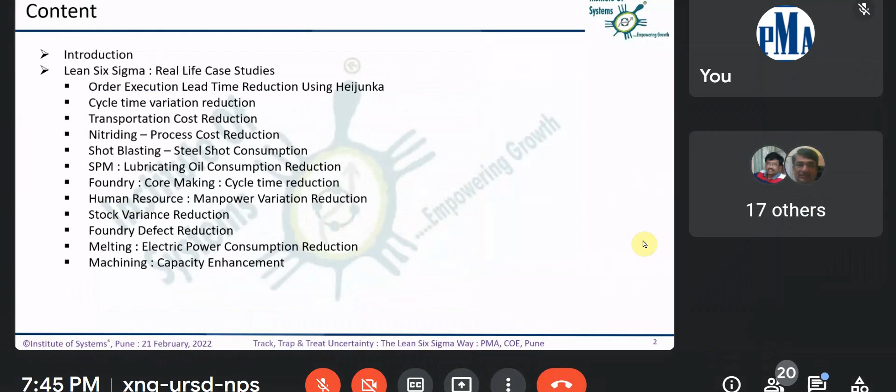So, trap and treat uncertainty. Uncertainty is something that we were never talking about, but then suddenly we started talking about. But there is a way you can deal with this, and this session will take you through how to deal with that. With all disclaimers, I'm saying this.

We are going to cover introduction to the topic basically, and then I'm straightaway going to go to the real life case studies, which are coming from 12 different case studies that I wish to speak upon, but time is a constraint. So let us see to what extent we can cover this, and there is a rider to that - I should be making it interesting and appealing to you. Hopefully I may be able to do that.

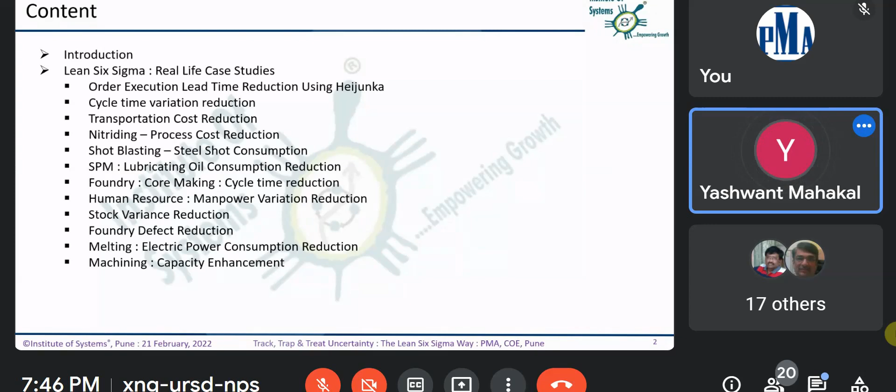So friends, let's go with the introduction. You must be aware of these graphs by now. You must be scared of looking at these graphs, and this is nothing but the COVID graphs that you would mostly not wish to look at - daily deaths and daily new cases. And this is the thing because of which this word became

unfortunately popular: uncertainty. Otherwise, this uncertainty word for manufacturing people was only limited to a guy who is doing calibration in the lab, looking at the uncertainty band for an instrument. Beyond that, that word uncertainty never came out of the calibration lab as far as manufacturing professionals are concerned. But then the entire world knew about it in the last 2 years.

So what is this uncertainty? As we all experience this - the source of uncertainty is something related to, in philosophical language, unknown and unknowable. Unknown and unknowable. This is nothing but the definition of truth, and uncertainty is nothing but truth. We have to live with that. And the truth, by its characteristic, has two characteristics - unknown and unknowable. So we're experiencing this reality.

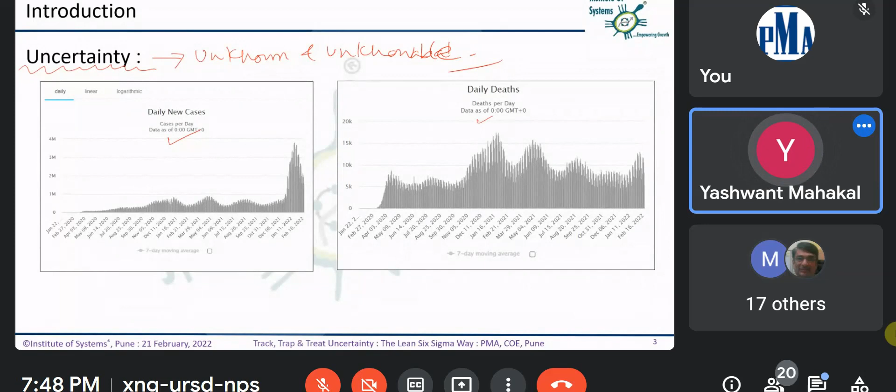Now, how do we deal with this? We need to understand the three categories of uncertainties in business. One comes from external sources, which is like nature - COVID is one of that. Government policies, society, various cultures - they all bring uncertainty with them.

Then in business, the second source of uncertainty is the customer. If you ask a production planning and control guy, PPC guy, he would always say that the demand fluctuates, schedule fluctuates, and he may get a call from a customer anytime. He is the most uncertain person. Marketing guy is the most uncertain person. So it's not that we haven't understood uncertainty ever - in fact, we experience it every day, but we never talk about it. We started talking about it globally, so loudly, with COVID, but we were living with this all along.

Then there is organization and supplier network who experiences the uncertainty in purpose, uncertainty in policy, uncertainty in procedures, processes, and the way professionals behave. So everywhere, the uncertainty is seen. And if I may start, there are gurus who have talked about this.

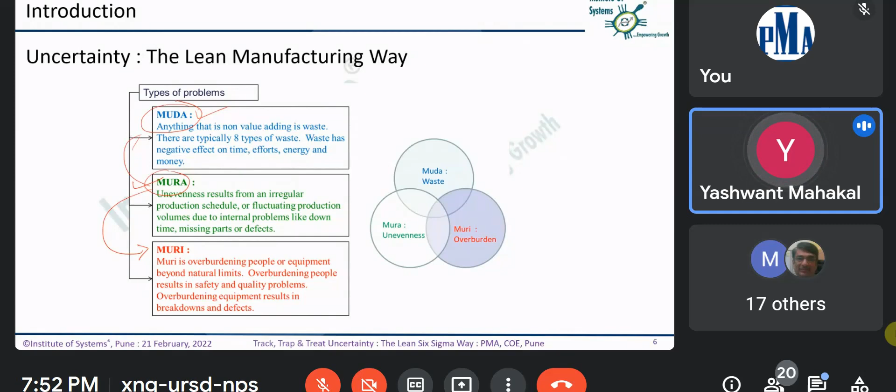But then we are so busy in eliminating wastages that we forget about the unevenness, the variation. And all of these, including 5S, TPM - you take a tool, it talks about the foundation of that happens to be reducing variation. We go further.

In Six Sigma, what are we doing? We are trying to separate total variation into inherent variation or variation due to common causes, and the variation in between the resources, which is nothing but the variation due to special causes.

Okay, so if I go back, there are ways and means to see. Actually, there is no way to treat uncertainty which comes from external things. There is absolutely no way. Partially, you can treat some of the things.

He being your business partner, your customer, you can tell him, request him. You can't request nature. Customer, you can request and work on something. And then this is in your control.

The uncertainties because of organization and the supplier network - so you have to work with your own uncertainties, plus you have to take care of the uncertainties that are coming from customer, plus you have to take care of the uncertainties that are coming from nature. So you have to be 3 times robust.

That's what the intention of these Lean Six Sigma tools is. So there is a bottom line problem of uncertainty which both these tools talk about, and there are ways to deal with this that are given. I'm not going to get into the various tools.

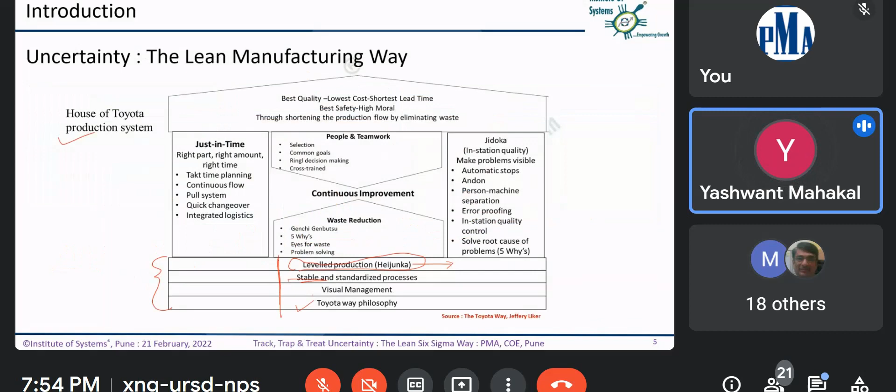I'm straightway moving towards the first case study, which is talking about one of the foundations of Toyota production system, and that is nothing but Heijunka. This case study is about order execution lead time reduction.

This is done with one of our clients. This is with our client Specialty Urethanes, who make the nylon wheels which are used for material handling trolleys.

They were victim of the large uncertainties or longer lead times for their various products, and longer lead times were of this extent - longer lead times to the extent of 44 days, average of 44 days and median of 54 days, with this uncertainty band of 58 days, which is an interquartile range.

So what we did, we applied a tool to understand this variation. We applied a tool to understand variation, which is known as the customer demand analysis, which uses a very useful indicator, that is coefficient of variation.

Now, this coefficient of variation understands the fluctuations in the demand and average demand, and it's a ratio of mean fluctuations in the demand with respect to the average demand. So what you are trying to understand from this is how each product has the average lift and what are the fluctuations there.

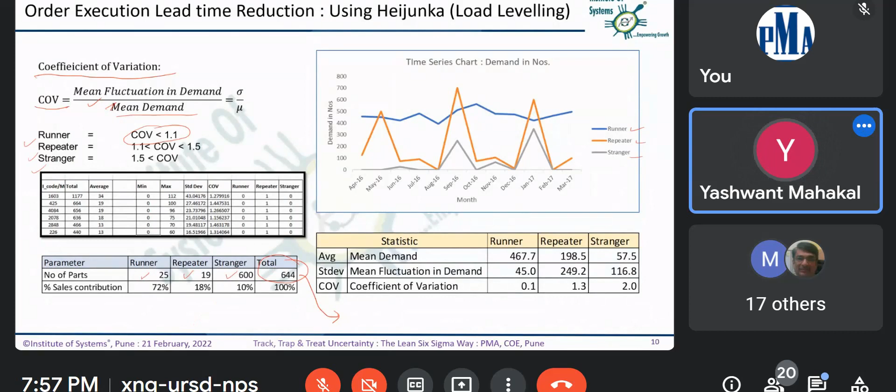There are patterns which can be seen for runners, repeaters, and strangers, and you can identify out of all your products how many are runners, how many are strangers, and how many are repeaters. There were total 644 products. This itself is variety, but this is not variation. You have to solve this. So you classify the products on the basis of coefficient of variation into 3 categories and then give your treatment. Now the problem with these higher order execution lead times was that they had a production method which was make to order.

I mean, whenever the customer demands, they would supply. Hence, since runner parts are required daily, they would always focus on doing runners, and whenever a customer demands repeaters or at times strangers, so somewhere in a week a couple of times a stranger would come, a couple of times a repeater would come, but all the time you will find runners are being done, and stranger or repeater parts are never given priority.

So what we did, we thought of changing this, and we used Heijunka, which is load leveling. Heijunka actually means every part every day - that's the philosophy Toyota teaches us. You should produce every part every day in the same amount with repeated patterns. So we thought of applying something like this.

We took advantage of the manufacturing method that they had. This manufacturing method is very interesting. What they are doing is using a metal insert. This metal insert is cast at the Belgaum factory, then machined at Satara, and then at Specialty Urethane they make these nylon wheels. And they have a set of three ovens: preheating oven, curing oven, and casting oven, wherein these molds are used.

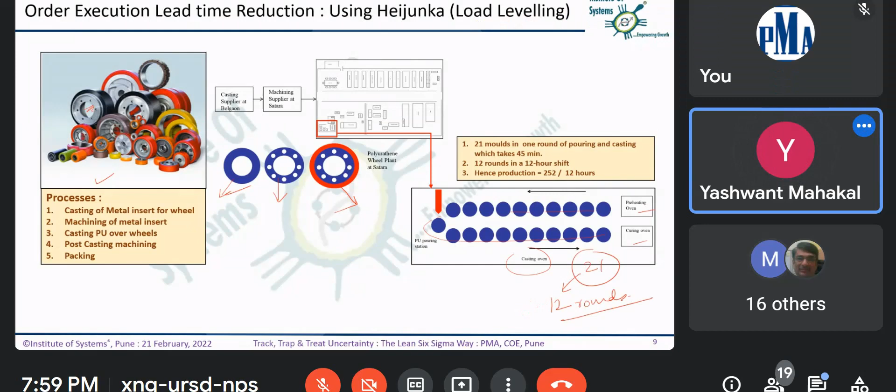To take advantage of this, instead of putting all runners on this molding line, we thought of doing something very interesting. Instead of doing all runners or all repeaters or all strangers at a time, we divided this into proportion. So out of 21 molds, every round - every 45 minutes - 2 were strangers, 6 were repeaters, and the rest were runners. So now, instead of having a stranger made once a week, you are making a stranger or repeater every round, that is every hour.

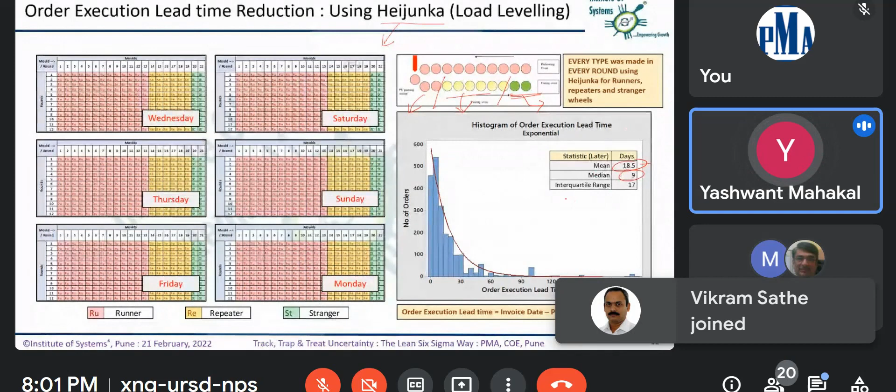As a result of this, the overall variation in the lead time was brought down by almost half - the mean dropped from 44 to 18.5. The median dropped from 25 days down to 9. The interquartile range, the variation here, was brought down from 58 to 17. So that's Heijunka for you, sir.

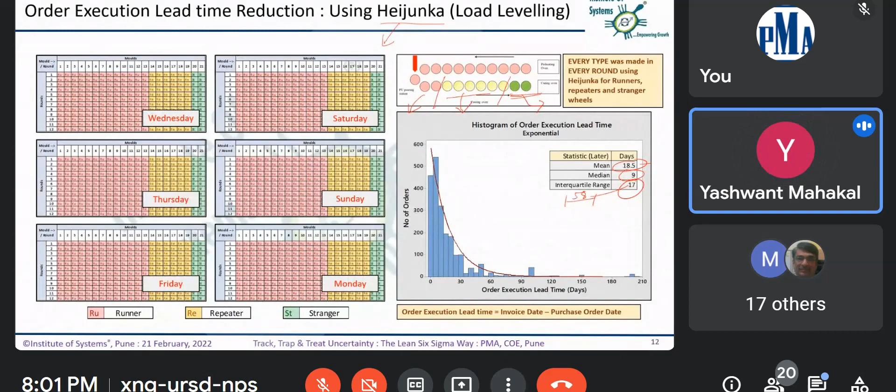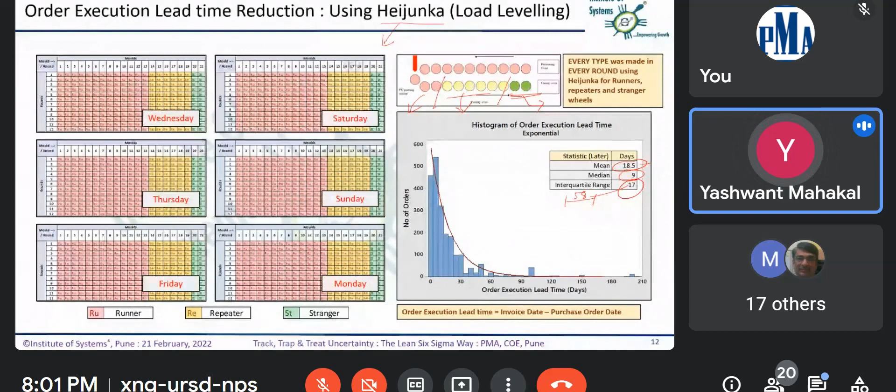This simple technique worked, and the production guys got a set pattern, and the variation in the production pattern also got reduced. Customers started getting parts early, and finally you could see a picture like this. Look at the lead times - this is the uncertainty. Because of your problems, the customer is facing uncertainty: will I get the material or not? Now that uncertainty band has dropped considerably, by almost 60%, and their lead times dropped, and their orders increased, and they are able to be treated better.

So this box plot shows you the earlier uncertainty. This is the box plot band, and this is the band they are having now. Previously the outliers were not so high, but now, because of the reduced variation, outliers would start from here - these were not treated as outliers statistically earlier. Only these were treated as outliers, more than 150 days. Now, even if it's more than 1.5 months, it's treated as an outlier.

So that's what happened because of Heijunka. Heijunka is a way to reduce variation in how production batches are taken, having a repeated pattern on the production shop floor. This is the most neglected tool - we will talk about 5S, TPM, SMED, Kanban, but we will never talk about Heijunka because it is difficult to implement. So that is the first case study, friends.

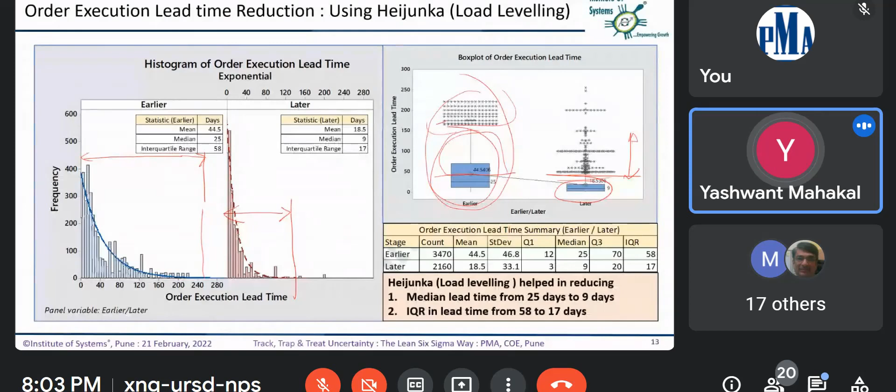Let us go to one more victim of uncertainty, that is, variation in the cycle time.

Industrial engineers by nature will always find out the averages. They will never take into account the standard deviation, though the ILO Industrial Engineering Handbook says you should find it out. But it is not practiced. It is not practiced, and they will only find out the averages.

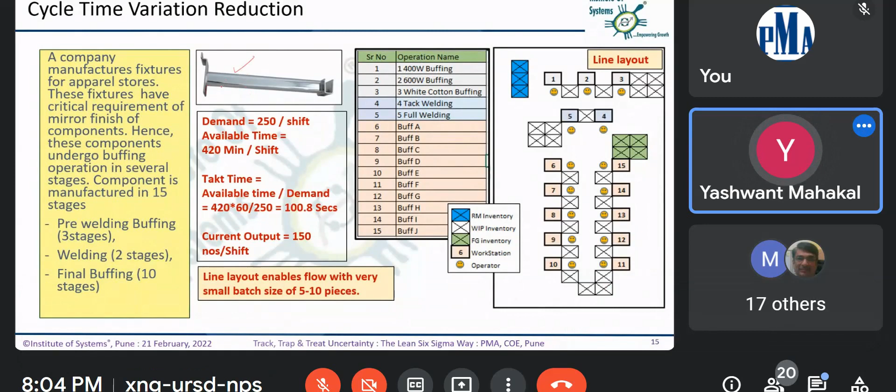So what happens here is, this is one of our clients, Pro5 Engineering from Chakan. They have a line setup wherein some assemblies for apparel store parts of Apple are made. They make these stainless steel parts and buff them to have a mirror finish. This is the process wherein buffing happens - pre-welding buffing, then welding, and then there are 10 stations where final buffing happens to make the mirror finish.

Now the problem here was that the buffing content is so high that it depends on a lot of inspections. Though there is a line, a so-called single piece flow, there are small batches, 5 to 10, still they were having problems.

Now the problem was, and we were all clueless, why are we having lesser output? So we started tracking the cycle times for each part, and we did this for almost 20 odd parts at different times. Then what we realized is that the cycle times - we used box plot and ANOVA, analysis of variance, as a tool for understanding the variation in the cycle time.

We were all using these averages, but then there is variation in the averages. So there is within-group variation, within-station variation, and between-station variation, which is causing the trouble. And along with this is uncertainty.

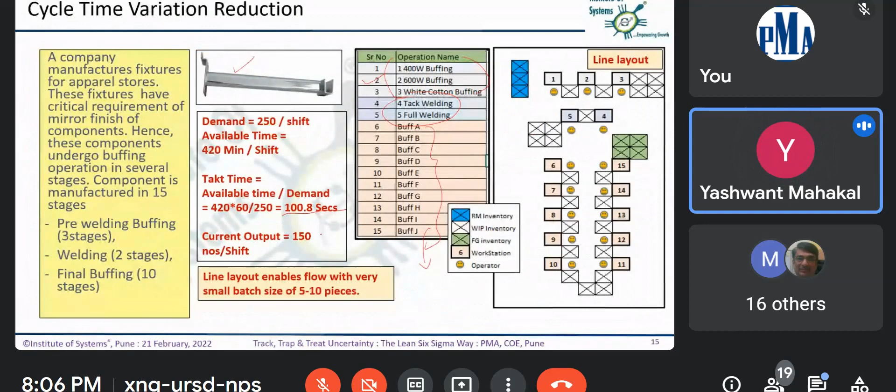So this was identified. For these stations, the industrial engineering process mapping of operation, transportation, storage, delay, and inspection - all activities were bifurcated, and we found out for each operation what are the contents for value adding and non-value adding.

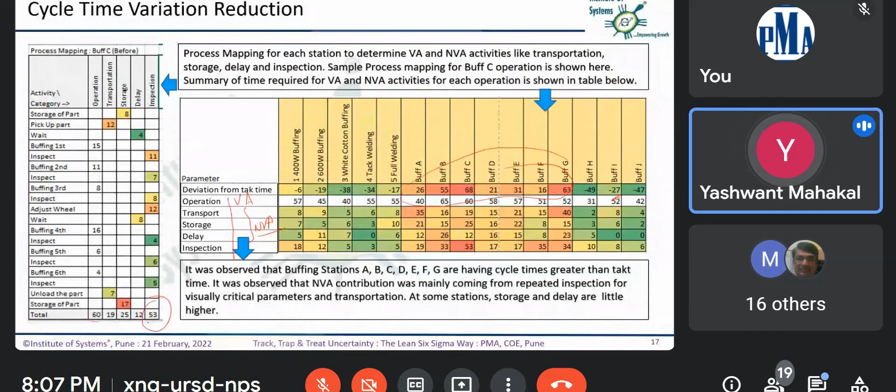It was because of the poor buffing wheel that we had. So we changed the buffing wheels, and we did 25 odd kaizens for reducing transportation and storage.

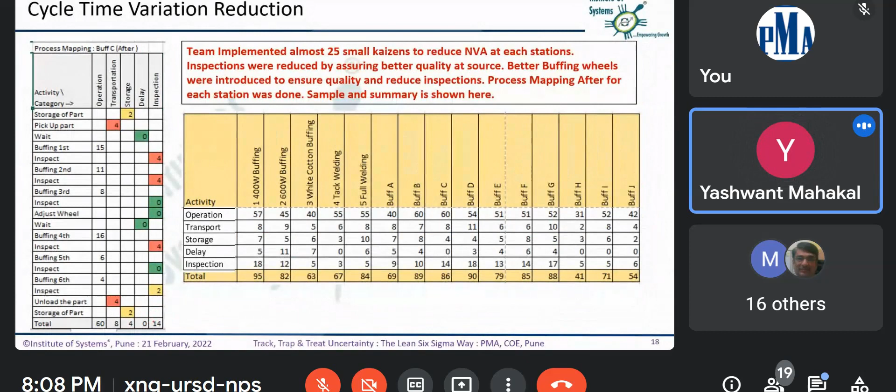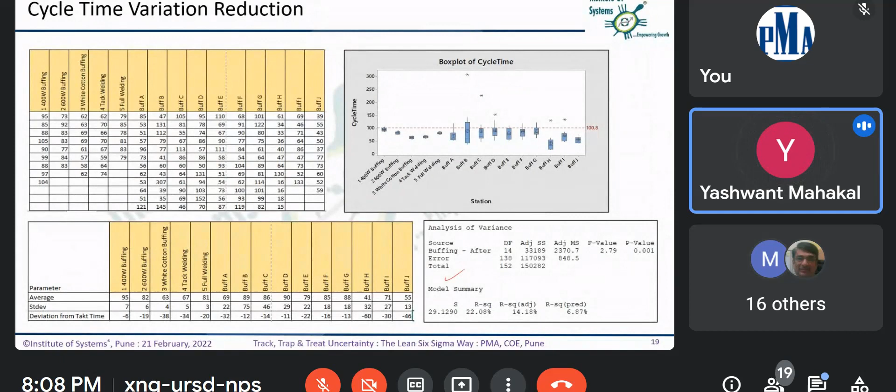Finally, because of that, the cycle times came down, and their variation also reduced. The analysis of variance, which was used for comparing the variances, showed that now the variation is not significant. And that's how we got rid of the cycle time variations.

I mean, not rid of completely, but to the extent that we were able to supply to the customer with the required schedule. So we reduced the mean cycle time and reduced the variation, so that the entire variation, barring a few exceptions, is lesser than the takt time. The entire spread is lesser than the takt time.

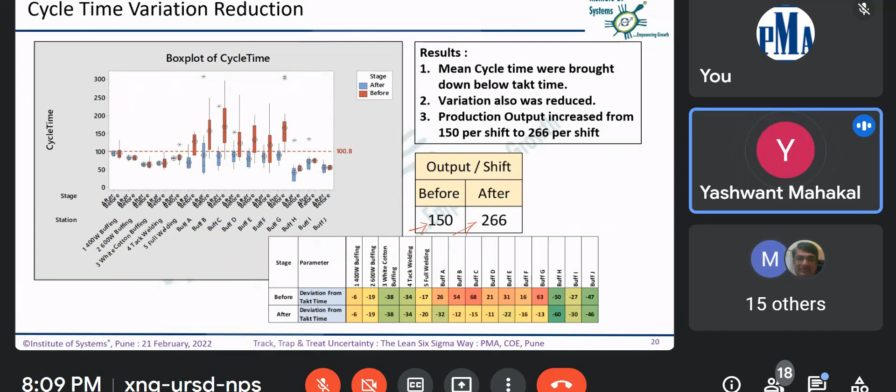So we could manage to raise the production from 150 to 266. Okay, so that's the second case study. Let's move on to the third one.

This is transportation cost reduction. Now transportation is again dealt with by PPC, marketing, stores, logistics people, and there is a network of drivers and fleet owners, guys from the godown, and the logistics guys, the third-party logistics. So all of them are involved, and it becomes a complicated affair if you have more number of vehicles.

We had a client which was having 6 vehicles, all 4-wheelers, and they were getting material from 396 suppliers, supplying it to 13 customers. There were 7 drivers - the 7th driver is on the bike, so I have not included it here. Variety of goods they were handling was 24,000, and the number of routes they were dealing with was 1890. Their transportation cost per month was 1.22 lakhs.

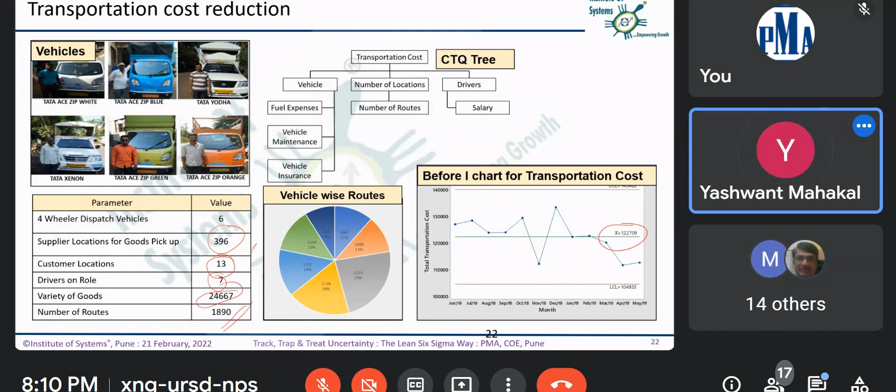So this is a group wherein they are using their own vehicles, and we were given the task to reduce this transportation cost. So we started tracking it.

We thought that manual tracking would help, and we started with some mechanisms available to track rupees and kilometers. But the number of trips was so huge that it became difficult for us to track, so we adopted GPS tracking of vehicles. GPS trackers were fitted in each vehicle, and mobile apps were given, because for tracking uncertainty, you need to invest in automated gadgets.

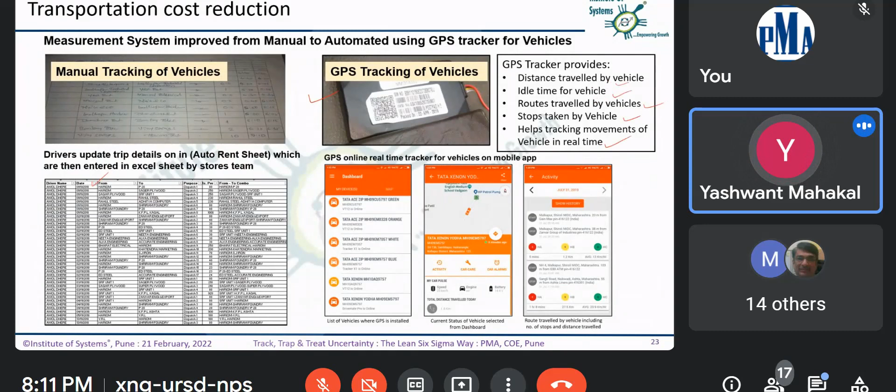So that's one example. Distance traveled by vehicle, idle time, routes traveled, stops taken by vehicle help track movements of the vehicle in real time, like that.

So now what we did, we performed combinations of from-to locations and found out the total number of routes. Then for each route, we found out the frequency of vehicles making trips on a given route, and we also found out the cost. Based on certain calculations, we categorized the routes into high cost and high frequency. The frequency of vehicles varies, the cost also varies, and the complexity is very high, so it becomes a difficult problem to tackle.

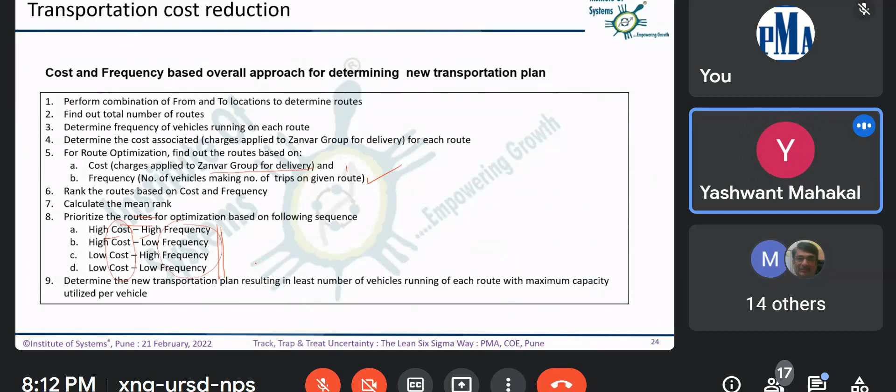So we divided the routes into high cost high frequency, high cost low frequency, low cost high frequency, and low cost low frequency, and then we thought of giving treatments to that. This is the historical data that was collected from the gadget.

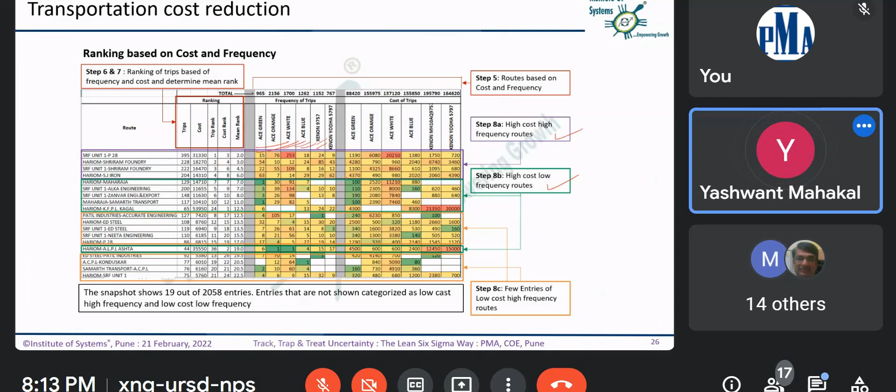Now what we did, we again did some analysis and found out the routes which are high cost, high frequency. So for all 4 routes and their contribution for each vehicle, all 6 vehicles were analyzed to see which vehicle serves which route, and the critical routes for each vehicle were found out.

Now what we did, we had an approach to deal with high cost and high frequency routes first. So 5 destinations, including this one customer, where the vehicle runs on this route on a daily basis. One big four-wheeler vehicle is identified for addressing all the high frequency, high cost routes.

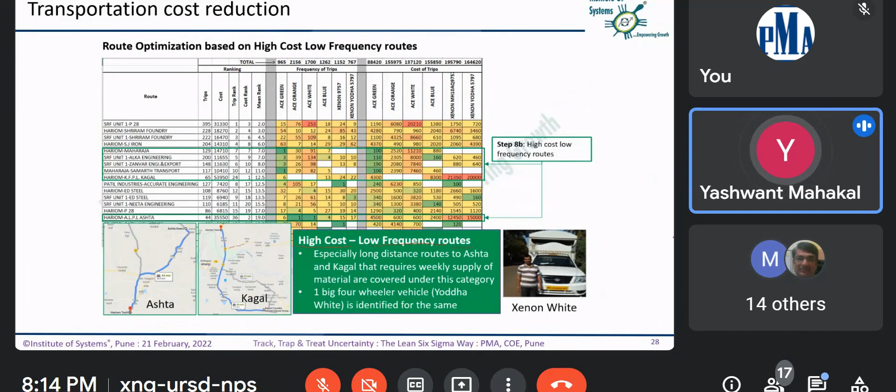Then long distance routes, which are high cost because of long distance, and low frequency routes were given to one more vehicle. Earlier, all vehicles used to do the work on every route, and it was all disrupted. So we tried this new approach: for high cost, high frequency, we gave one vehicle.

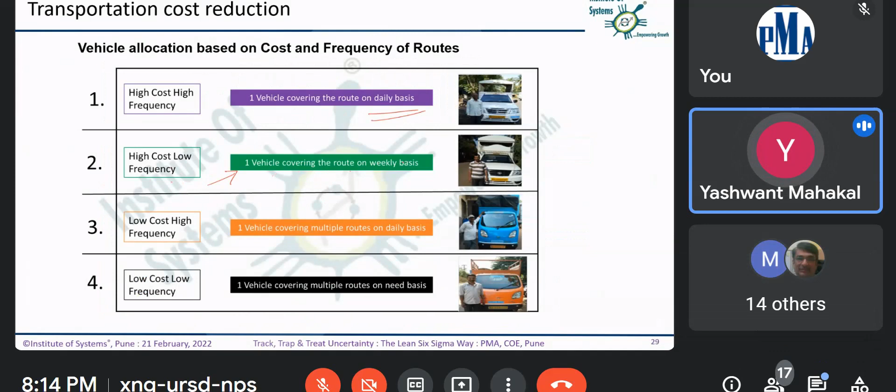That vehicle will work on a daily basis. Another vehicle for high cost, low frequency, will work on a weekly basis. Then for low cost, high frequency, one vehicle covering multiple routes on a daily basis - he's the guy who will face the most uncertainty. And for low cost, low frequency, one vehicle covering multiple routes on a need basis, as and when required. So that's how the classification was done.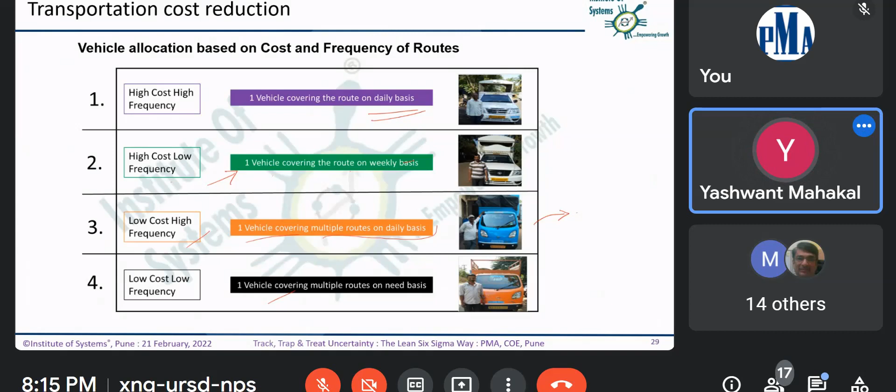So it was tracked so well through GPS. It was mapped with the logic of high cost, low cost, high frequency, low frequency, and treated with these prescriptions. After that, there is again a weekly plan here for deliveries.

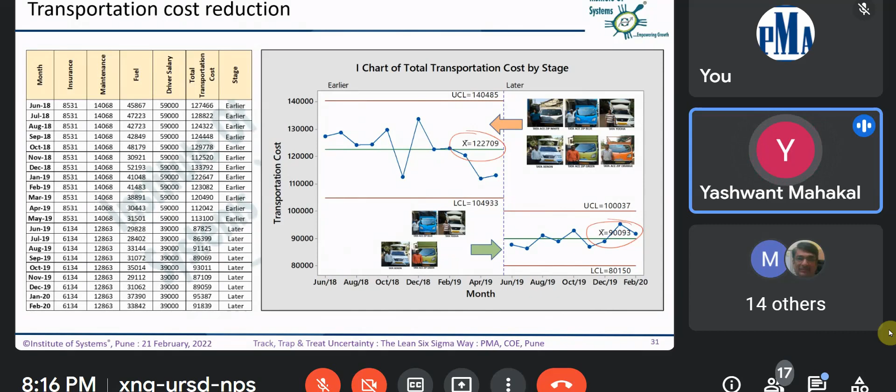Third case study, the transportation cost case study. I'm deliberately keeping quality case studies away, because if you talk about Six Sigma, they will all the time talk about quality related topics. But I wanted to draw your attention to this.

This is shot blasting, steel shot consumption reduction. This case study is related to the shot blasting process, where steel shots are used. These are getting consumed since they are steel shots, their cost is higher, and there is wastage in that, which needs to be reduced.

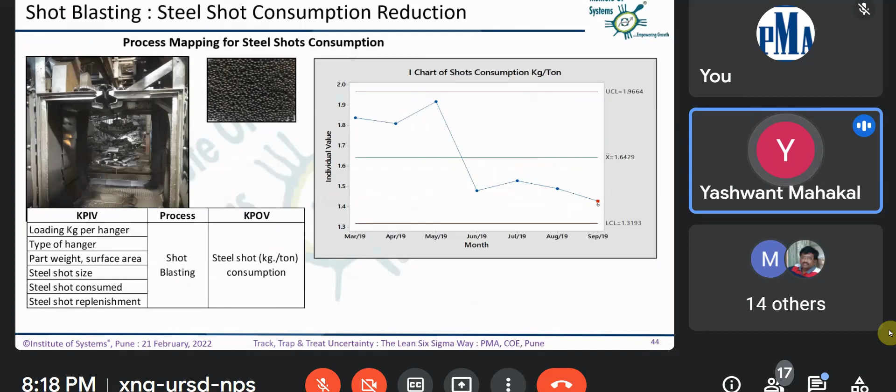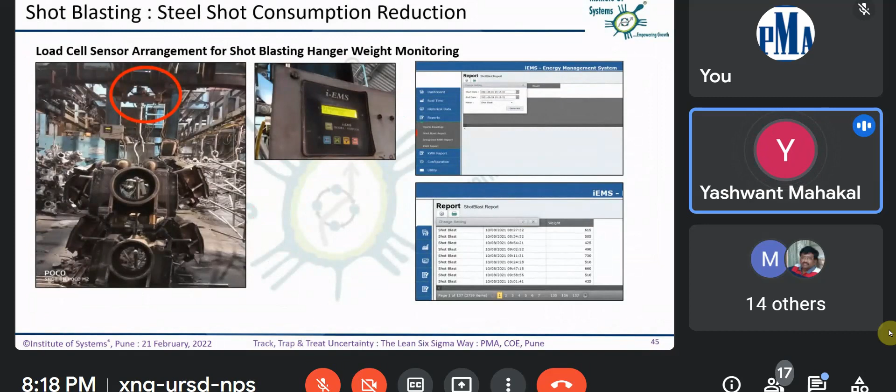So what we understood first of all was that for the shot blasting batch, the load in the shot blasting machine was never measured. So we put a load sensor there, and we measured the weight of every hanger that would go into the shot blasting machine, and we got this.

So this is uncertainty. This range is very high, and they were saying that 300 is the logic, 300 should be the lower limit. It should not go below 300.

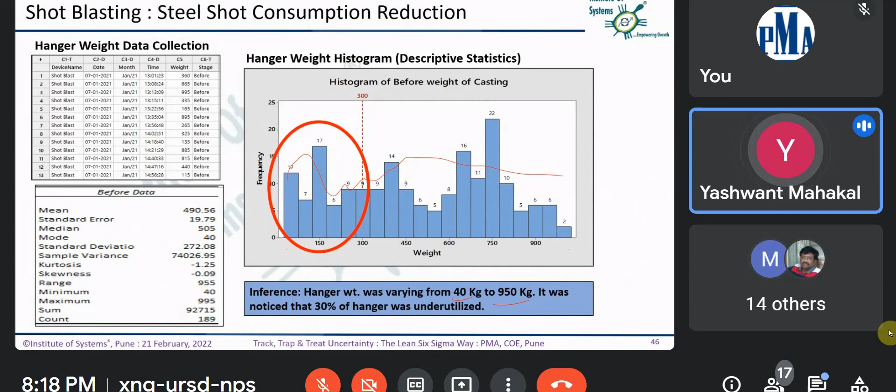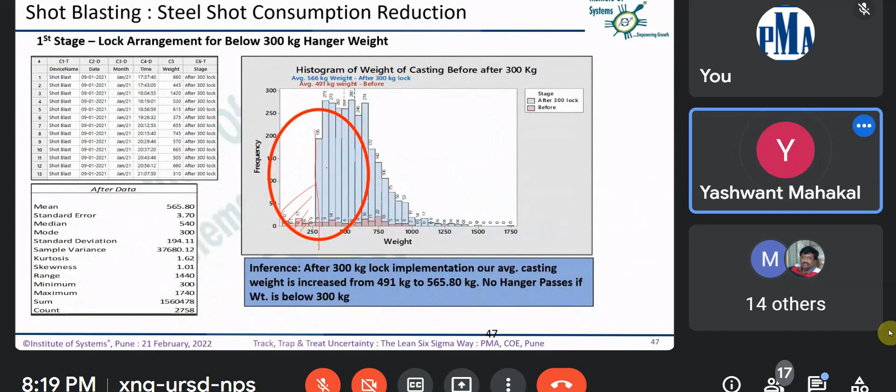So we put an automated lock there, and now you can see a sorted histogram. There is nothing on this side, the below-300 portion is gone. So we could see the result, but then we became greedy.

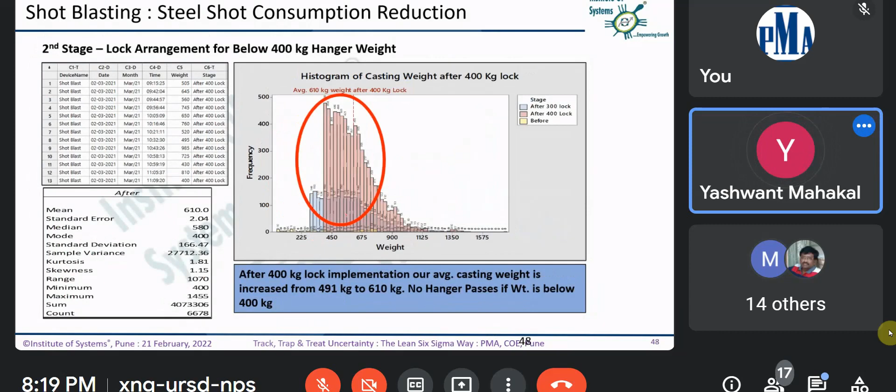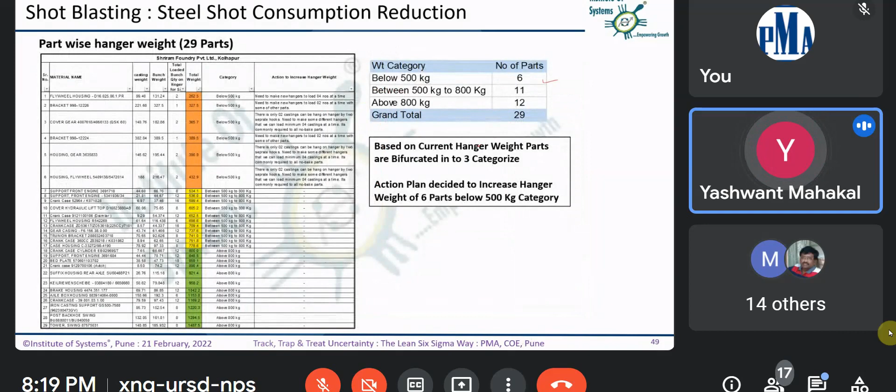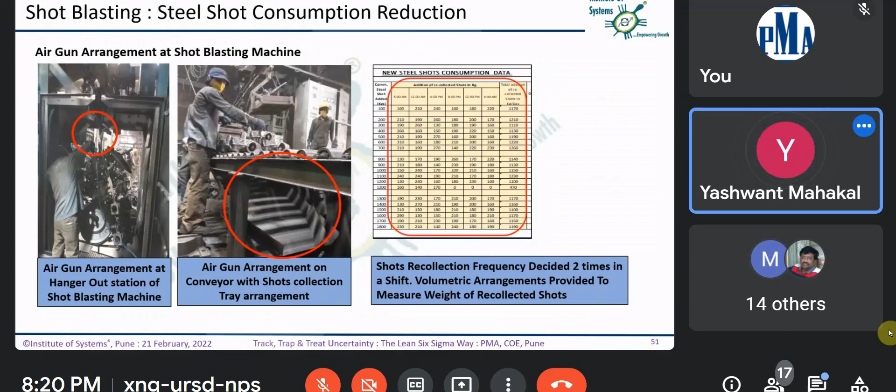Then we worked on the variation in how many parts are being loaded. There were some parts which were loaded with a lower number of parts per hanger. So we improved the fixturing, and we improved the numbers per hanger. And then there were some other kaizens that were made, and finally some cycle time reductions that were done.

And finally we went from 1.64 kg per ton, which is very high, and because the number of tons that you produce on those shot blasting machines is very high, this is reduced by almost 25%.

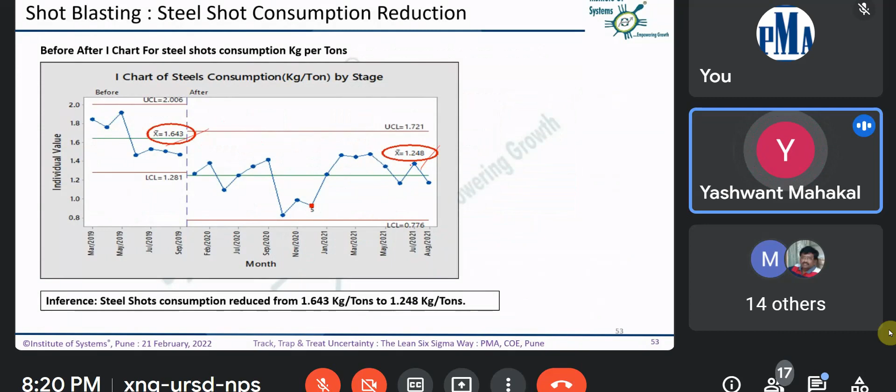And taking us through various different types of cases, which probably gave all the attendees a very good idea of exactly what's involved. So that's great, a great methodology of getting into details, because if I understand correctly, whatever I have learned of Six Sigma and Lean, it's not a very cakewalk type of topic. But Yashwant Mahakal, you made it reasonably simple, not getting into a lot of mathematics and this thing.

The basic thing of this is a lot of data point collection, analyzing that, using various methodologies, tools, technologies, and automation, getting into some kind of reports and taking a weighted management decision, which increases the productivity and reduces the cost. So that's overall the understanding of this.

Now I would like to first... Kishan, Sunil Khedkar. Yes sir. Right, what was the last action actually? Remedial action was taken, corrective action for the last case study, shot blasting. I missed that, the action taken.